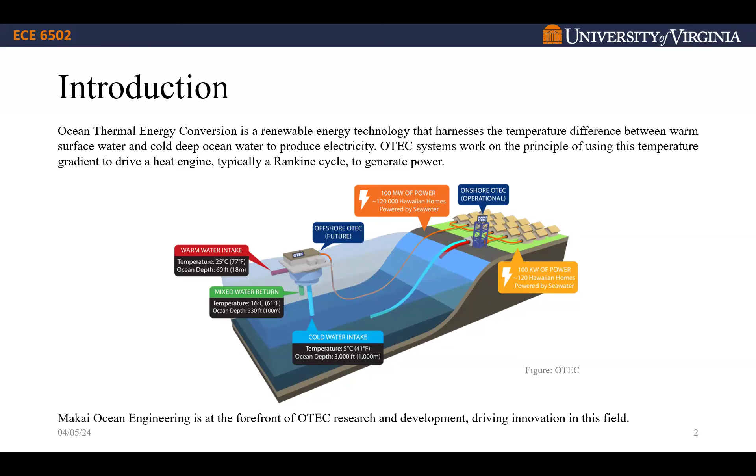So how does OTEC work? On the right hand side, you can see two types of depiction of the same thing. There are a few key components: some pipes, some working fluid, pump, a condenser, evaporator, turbine, and generator. So how does it work? At first, the OTEC system uses warm surface water from the ocean. Typically, the temperature stays around 25 degrees Celsius or 77 degrees Fahrenheit in tropical regions.

It uses the temperature to vaporize a working fluid with a low boiling point, which is usually ammonia or something like that. This vaporization process occurs in the heat exchanger. After that, the vaporized working fluid expands and drives the turbine connected to the generator. This turbine spins and generates electricity.

But after that, the vaporized working fluid needs to be condensed back, and this is done by the cold deep ocean water, which stays nearly around 5 degrees Celsius or 41 degrees Fahrenheit. After condensation, the working fluid cools down to liquid form, and then it is recirculated throughout the process.

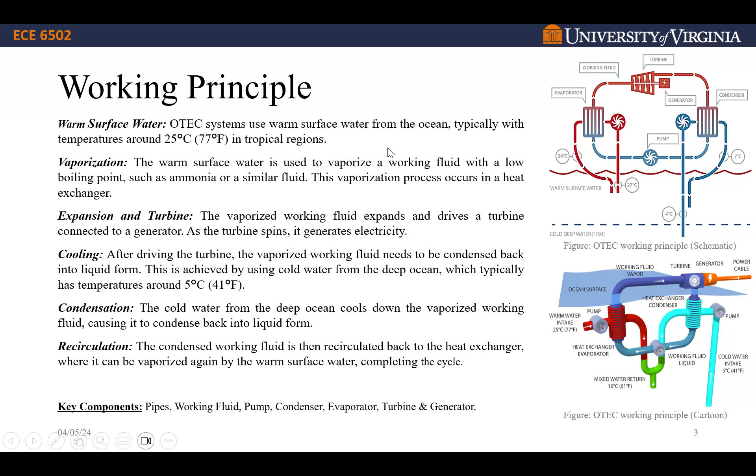So for this, it is very evident that we need tropical regions to perform this type of energy conversion. And here is a heat map that shows the highest heat gradient available all over the ocean area we have. And the most potential locations we have are Hawaii, Caribbean islands, Southeast Asia, Indian Ocean islands, Pacific islands, coastal regions of Africa, and Central and South America.

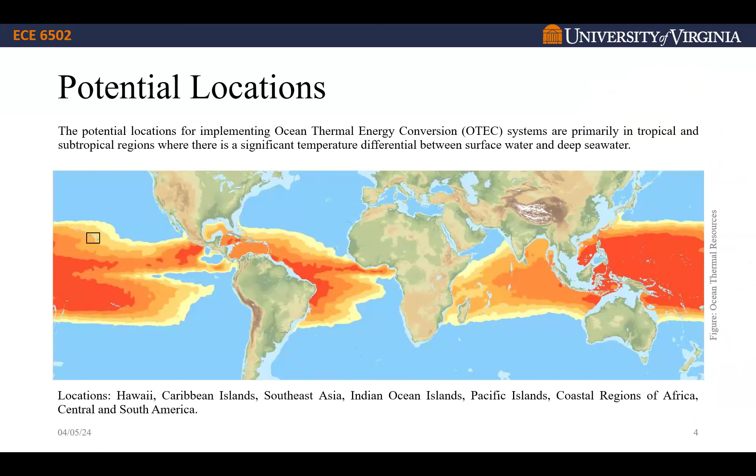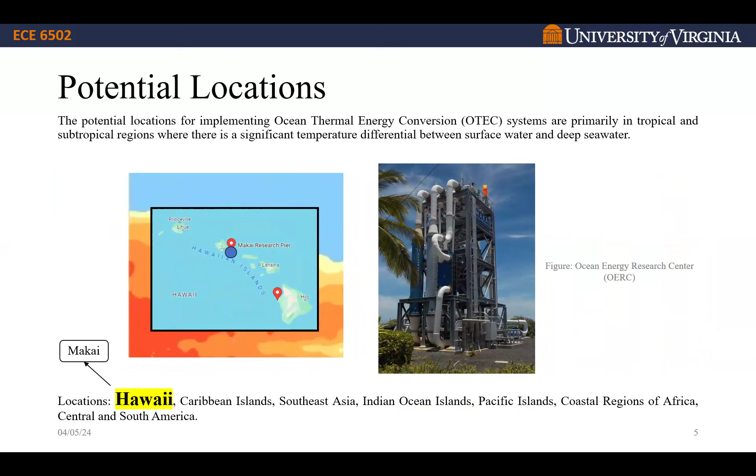Here you can see this is where the Hawaii Makai plant stands, and it's an onshore energy conversion plant. So here are the details about Makai Ocean Engineering. It is equivalent to 105 kilowatts of power. The working fluid here is ammonia. It is a closed cycle. The closed cycle means the working fluid never leaves the cycle, and it's an onshore plant.

It sources its seawater from its sister organization NELHA, and it was established in 2011, and it started its operation in 2015. And here's the location, which is Hawaii.

So now let's look into onshore and offshore options of OTEC. There are a few problems and a few pros and cons for both. For example, if the plant location is offshore, it needs to have a lot of stuff around it, like ships, and other maintenance things need to be shipped to them in the middle of the ocean. But when it is onshore, it's near land, so it's easier to access.

The proximity of thermal gradient: obviously, offshore, the depth of the ocean is higher, so the thermal gradient is going to be higher as well. So it's directly below. But for onshore, the depth of the ocean is not great, so we need to take the lower temperature water from the deep ocean that is far away from the source.

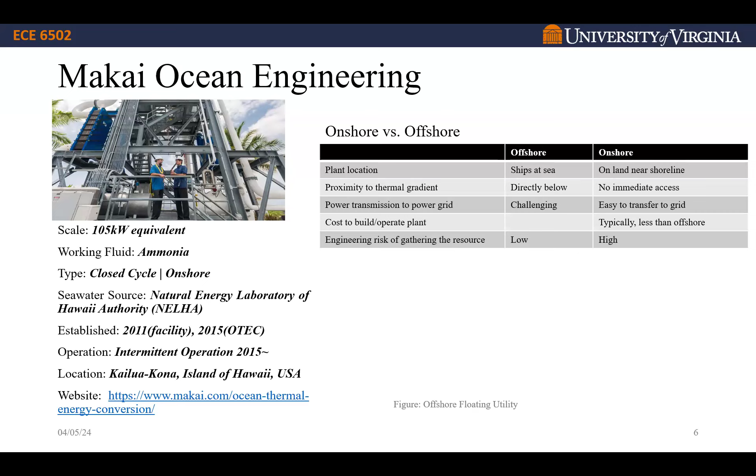For power transmission to grid, for offshore, it's obviously challenging to transfer the power generated, but for onshore, it's easy to transfer to grid. And cost of building is obviously higher for offshore, and engineering risk of gathering resources is very low offshore, which is very high onshore. So based on all this, commercially, onshore ocean energy conversion is not commercially viable, but it's viable offshore.

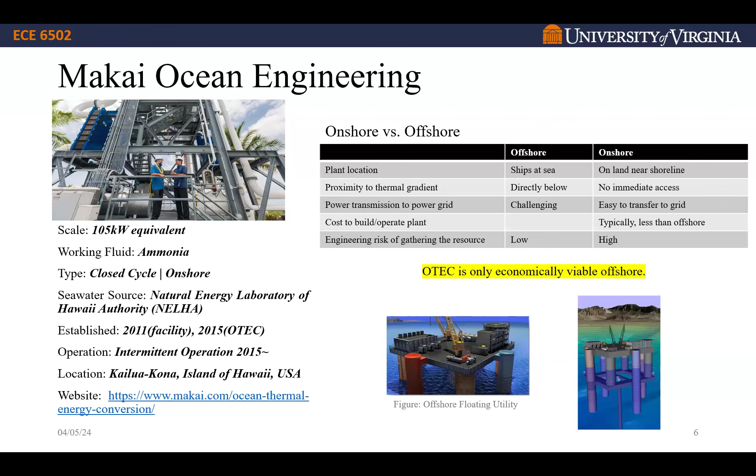So Makai is now researching different aspects of ocean thermal energy conversion. Some of it is seawater air conditioning. Seawater air conditioning is a sub-product of this renewable energy technology that uses deep sea water. Makai is the recognized leader in SWAC.

Another one is the Ocean Energy Research Center. It is also located in Hawaii. OERC is demonstrating and improving the technology to harness the thermal energy of the ocean, which is the primary focus of the OTEC system. Research at the center also supports other deep ocean water technologies, including SWAC and marine heat exchange for various applications.

Grid-connected OTEC: Makai's OERC facility includes a 105 kilowatt turbine generator that became the largest grid-connected OTEC plant in the world when it was added in August 2015. This plant provides valuable data for developing OTEC power control and automation systems and improving future commercial OTEC plant designs and cost projections.

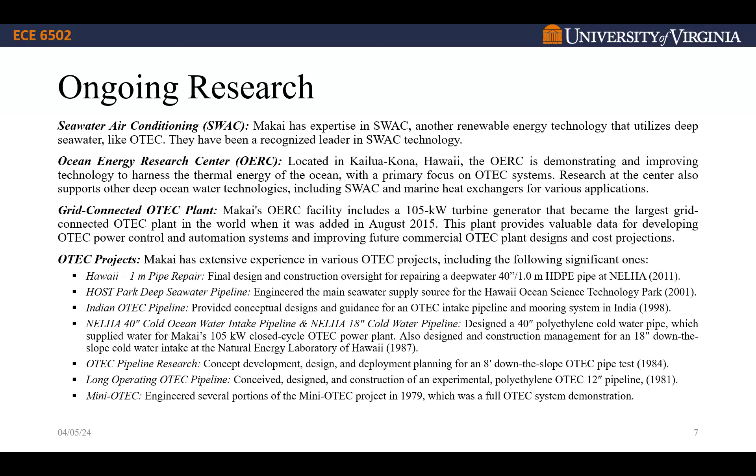Other smaller projects include the Hawaii 1-meter pipe repair, which is final design and construction oversight for repairing a deep water 40-inch HDPE pipe used to collect cold deep ocean water. Other things include the Host Park deep sea water pipeline, Indian OTEC pipeline, NELHA 40-inch cold water intake pipeline, NELHA 18-inch cold water pipeline, OTEC pipeline research, long operating OTEC pipeline, mini OTEC pipelines, etc.

One of the leading research areas is thin foil heat exchangers. Thin foil heat exchangers, or TFHX, developed by Makai Ocean Engineering, represent a revolutionary advancement in heat exchanger technology. What makes this stand out? First of all, it is ultra compact. It is significantly more compact compared to traditional heat exchangers, allowing for a smaller footprint for OTEC systems and other applications. So it is easier to plant.

Lightweight construction. TFHX is designed to be lightweight, reducing the structural requirements and overall weight of the system, which can be crucial for offshore installation. Corrosion resistance. TFHX is made from corrosion-resistant materials such as titanium, ensuring durability and longevity even in harsh marine environments. Form fitting. These can be customized to fit specific space constraints and applications, maximizing efficiency and performance.

Improved performance. This provides higher efficiency and performance compared to conventional heat exchangers, resulting in better energy conversion and overall system energy efficiency. And reduced material cost with versatile applications. It requires less material, so obviously less cost, and it has versatile applications beyond OTEC, including SWAC, marine cooling systems, shipboard cooling, and thermal storage, making it very versatile overall.

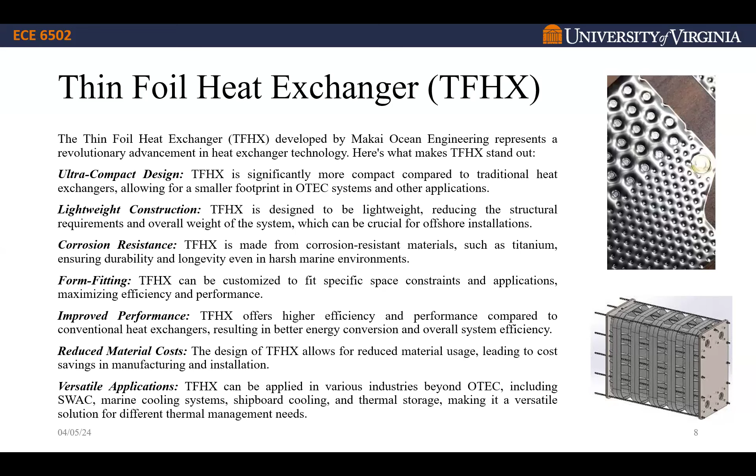For the future outlook, Makai Ocean Engineering's future includes several key aspects. First of all, OTEC is still in its very early stage, so they're focusing on commercializing OTEC. Their focus is on further reducing the cost, increasing efficiency, and demonstrating the viability of OTEC as a renewable energy source, with ongoing research, development, and demonstration projects to improve OTEC system design and components.

Expansion of TFHX technology. They are focusing on refining and developing this TFHX technology and aiming to commercialize it for various applications beyond OTEC. This includes those systems we talked about earlier. Collaboration and partnership. They're likely to seek collaborations and partner with other companies, research institutions, and government agencies to accelerate development and deployment of these technologies.

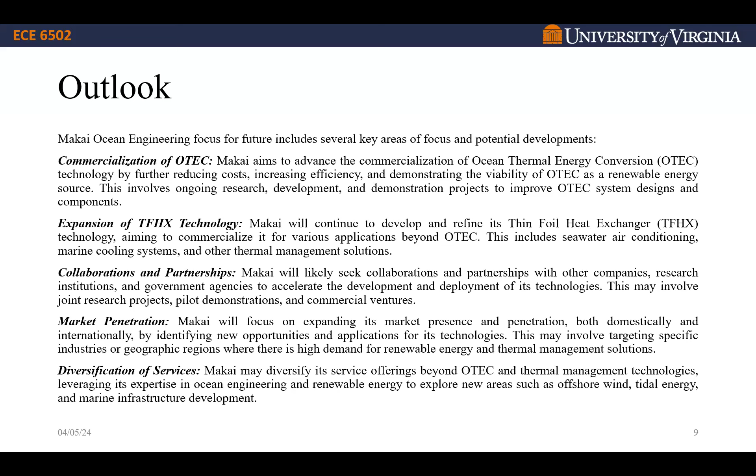They may be involved in joint research projects, pilot demonstrations, and commercial ventures. Market penetration and diversification of services. They are also focusing on expanding market presence and penetration in both domestic and international markets. And they are trying to improve people's view of OTEC to introduce it as a viable renewable energy source.

Now, what are the advantages of OTEC? First of all, this is baseload power generation.

So OTEC doesn't depend on other types of technology, like wind or solar, that work at a certain part of the day but don't at other times. An OTEC system totally depends on the thermal gradient of the ocean, which stays fairly constant throughout the day. So it can provide continuous baseload power generation, since the temperature difference between warm surface water and cold deep ocean water remains relatively constant throughout the day and night.

It is renewable and sustainable. It doesn't use any type of fossil fuel or any other source resources. So it is renewable and it produces minimal greenhouse gas emissions. High energy potential: a vast amount of solar energy is absorbed by the ocean, so if we can plant a lot of offshore OTEC plants, it has the potential to convert a high amount of solar energy to workable electrical energy. Continuous operation, which I have already covered.

Co-product utilization. The OTEC co-products include SWAC, seawater air conditioning, and it also can supply fresh water through desalination, nutrient-rich cold water to aquaculture, and chilled water for air conditioning. Climate resilience. OTEC can contribute to climate resilience by diversifying the energy mix and reducing dependence on fossil fuel. And potential for island nations. Island nations located in deep ocean have more potential to produce energy with a lower cost.

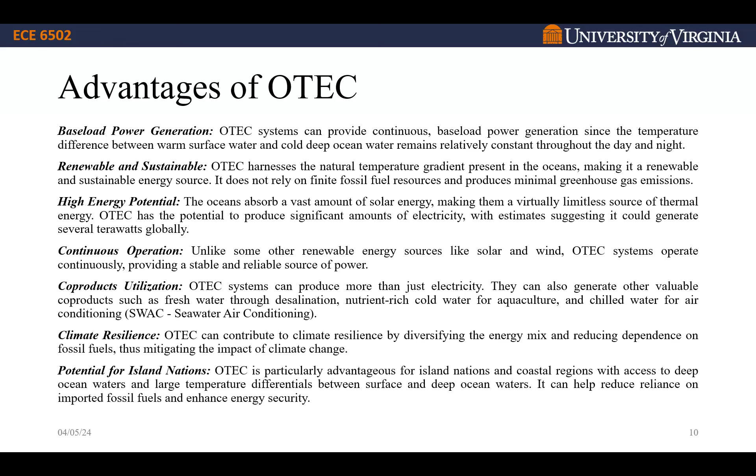But what are the challenges in OTEC? I have already mostly talked about them, so here they are. First of all, economic viability. In their present state, they are not economically viable. High initial capital cost and operational expenses hinder the competitiveness of OTEC compared to conventional energy sources. Scale and cost. Large-scale infrastructure requirements such as heat exchangers and offshore platforms contribute to the high cost of OTEC. Location constraints. OTEC is most effective only in the tropical regions, which limits the potential deployment areas due to the ocean temperature gradient.

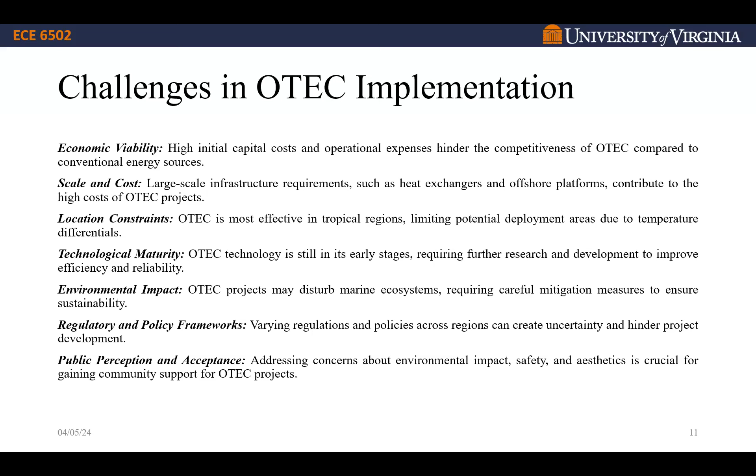Technological maturity. OTEC is still in its early stage, requiring further research and development to improve efficiency and reliability. Environmental impact. OTEC projects may disturb the marine ecosystem, requiring careful mitigation measures to ensure sustainability. Regulatory and policy framework, and public perception and acceptance.

So to conclude, OTEC stands as a promising renewable energy technology, leveraging the vast thermal energy stored in the world's oceans to generate clean, reliable electricity. Makai Ocean Engineering has been at the forefront of OTEC development, pioneering innovative solutions to overcome technical challenges and drive the commercialization of this technology. So this is the general idea that I shared throughout the presentation, and I think that's the end of it.

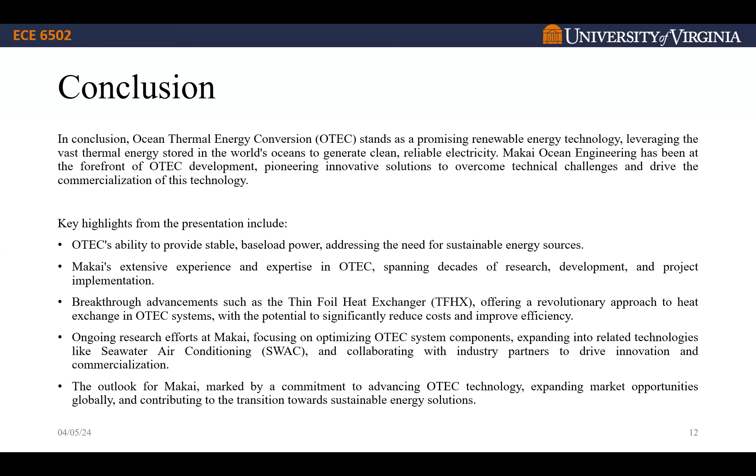Nassim, other than Makai, did you take a look at other places? Is there any other big one? This is the only one I'm familiar with, the only one functioning right now. There is one in the Indian Ocean region that they are trying to cooperate with. They are not functioning; they are still in the research stage. They are planning to start operation, I think, around 2024 or 2025. They're trying to plan an offshore energy plant, so it's tough compared to onshore plants, so they're taking more time.

Does Makai also do desalination, or do they not? Yeah. Okay. All right, thank you. Thank you.

Now switch to the lecture. So I'm trying to wrap up solar cells so we can switch to batteries. We went a long way. Before I start: we talked about the photovoltaic effect, we talked about recombination, and I started talking to you about how we separate electrons and holes, and that's where the p-n junction comes in. Any questions from previous lectures that I can address now?